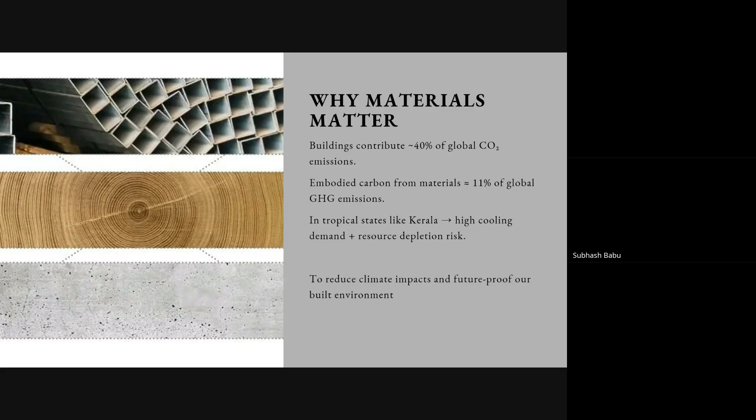This issue is particularly relevant here in tropical climates like Kerala. Our high climate demand for cooling, coupled with the intensive use of conventional materials, creates a dual pressure for increased energy consumption and heightened resource depletion. The objective of this presentation is to outline a strategic approach to mitigate this impact. By reevaluating our material selection, we can fundamentally reduce our environmental footprint and future-proof our built environment against escalating climatic and resource challenges.

This reality has prompted mandatory policy changes at every level. Nationally, we have the Energy Conservation and Sustainable Building Code, ECSBC 2024, earlier known as Energy Conservation Building Code. Kerala is the first state to publish the Energy Conservation Sustainable Building Code in the Gazette in the country, setting a new energy conservation standard, along with the Eco-Nivas Samhita, ENS 2024, which is especially focused on residential energy efficiency, just like our homes and thermal comfort.

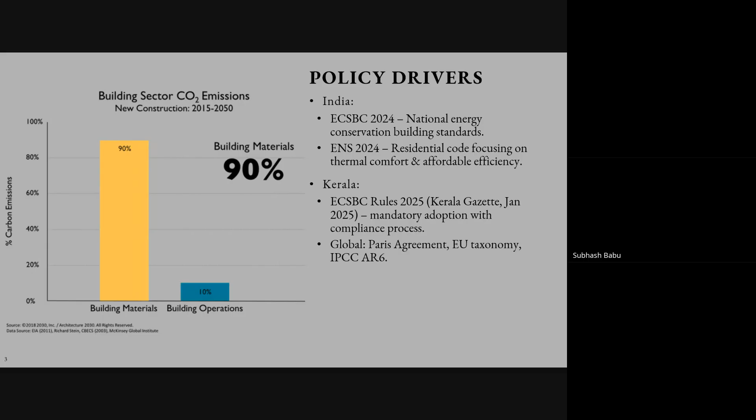Crucially, here in Kerala, the ECSBC rules 2025 have been gazetted, making the adoption of these standards mandatory, complete with the formal compliance process. And this is all aligned with the broader international commitment to decarbonization driven by major global accords like the Paris Agreement and the scientific directives from the Intergovernmental Panel on Climate Change, IPCC.

Having established the policy drivers for change, we now need a comprehensive way to evaluate our material choices. This slide introduces a framework for sustainability based on four critical dimensions. It's a holistic approach that goes beyond just carbon footprint.

First, the environmental dimension - this is what we discussed: a material's embodied carbon, its water footprint, and its recyclability. These factors are crucial for reducing a project's overall ecological impact. We must consider the economic dimension also.

We are not just looking at the initial cost, but the long-term benefits. This includes material's life cycle cost, which accounts for maintenance and disposal, and the significant operational savings it can generate through improved performance.

The third dimension, health, addresses the direct impact on people. We evaluate materials based on their ability to improve indoor air quality and whether they contain harmful chemicals known as volatile organic compounds.

Finally, we look at resilience. This is about the building's ability to withstand future challenges. Our material choices are designed for exceptional durability with an anticipated lifespan of 50 to 100 years or more, in full compliance with the National Building Code of India, NBC, and relevant Indian standards. We also ensure their adaptability and disaster performance against events like extreme weather.

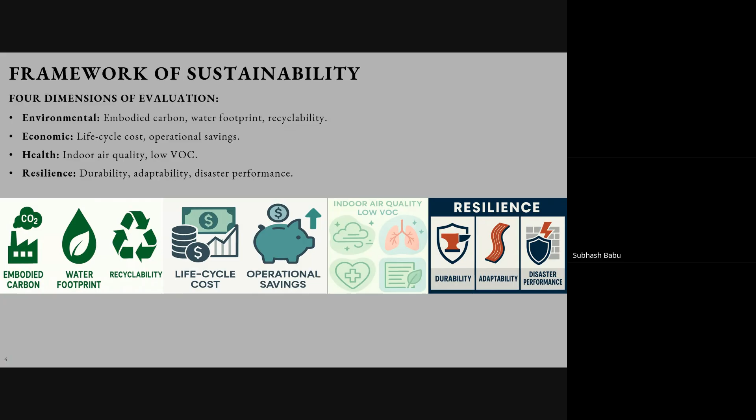We have discussed the framework for evaluating sustainable materials. Now, let's look at some key materials that meet these criteria. We are focused on the building envelope, which is the shell of the building that protects it from the elements.

First, let's consider the blocks for the walls. Alternatives like autoclaved aerated concrete blocks, hollow clay blocks, and compressed stabilized earth blocks have significantly lower embodied energy than conventional ones. They are not only resource efficient but also provide better thermal insulation.

Next are cool roofs. Materials with the high solar reflectance index, what we used to call the SRI value, typically about 78, reflect high radiation, so the heat absorbed will be reduced. This reduces the peak cooling load by 10 to 15%, directly translating to lower energy use.

For windows, advanced glazing is crucial. We use low emissivity and spectrally selective coatings that block unwanted solar heat while still allowing natural light to pass through. This enhances thermal comfort without compromising on daylight.

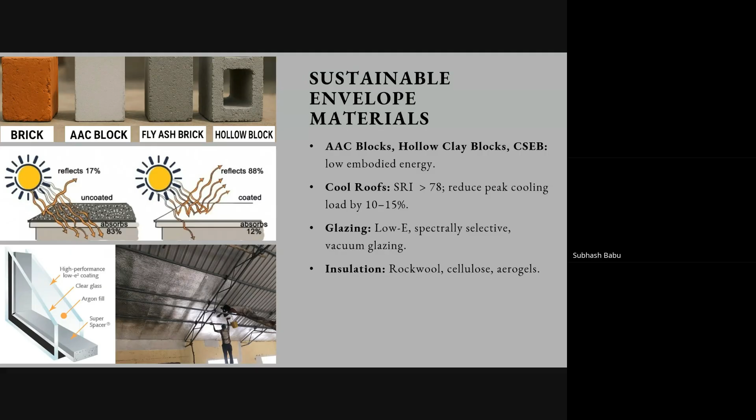After looking at the building, we have to focus on the single most significant source of embodied carbon: cement. The production of conventional cement accounts for roughly around 8% of global carbon dioxide emissions.

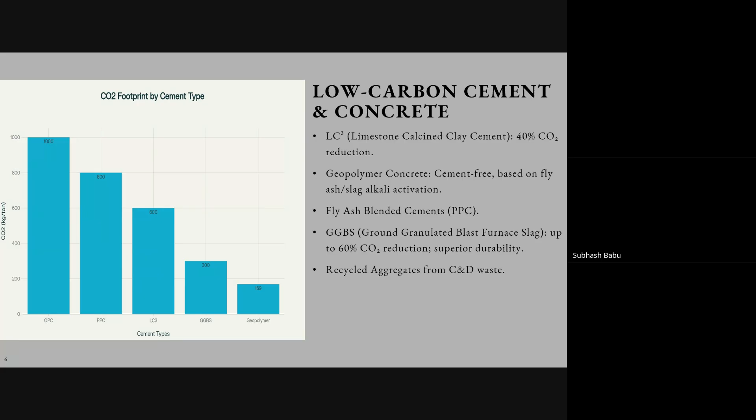However, a range of low carbon alternatives are now available. This chart clearly illustrates the dramatic difference in carbon footprint. As you can see, conventional ordinary Portland cement has a very high carbon dioxide footprint, while materials like geopolymer concrete have an incredibly low impact.

We have to achieve significant reductions in our projects by using these alternatives. Limestone calcined clay cement offers CO2 reduction. Geopolymer concrete is a game changer as it's completely cement free, using industrial byproducts like fly ash and slag. Similarly, we can use fly ash blended cements and granulated blast furnace slag, which can reduce emissions up to 60%, while also offering superior durability.

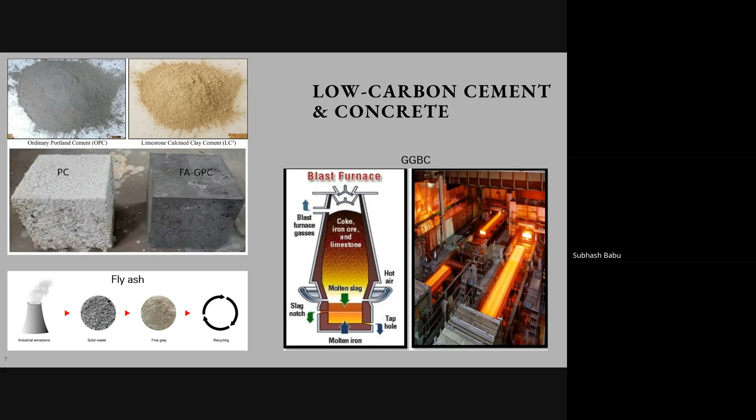We can also integrate recycled aggregates sourced from construction and demolition waste, which closes the loop on our material usage and reduces waste.

In addition to the innovations in concrete, we must also consider potential bio-based materials, which offer localized, rapidly renewable and high performance solutions.

The most prominent example is bamboo. Bamboo offers comparable high strength to timber, suitable for both structural and non-structural applications, including its innovative use in bamboo reinforced concrete construction. Its defining characteristic is rapid renewability. Bamboo matures within 3 to 5 years, making it an incredibly sustainable and rapidly replenishing resource.

This material has specific Kerala relevance. It is abundantly available locally, which significantly reduces our transportation footprint. We also have a long tradition of using bamboo in our architecture, from vernacular houses to scaffolding, which supports local economy and rural livelihoods.

From an environmental impact perspective, bamboo has very low embodied energy and a unique ability to sequester carbon, actively locking carbon dioxide away from the atmosphere as it grows. Finally, its applications are versatile, from wall panels and flooring to roofing and decorative elements, demonstrating its potential to be a comprehensive building solution.

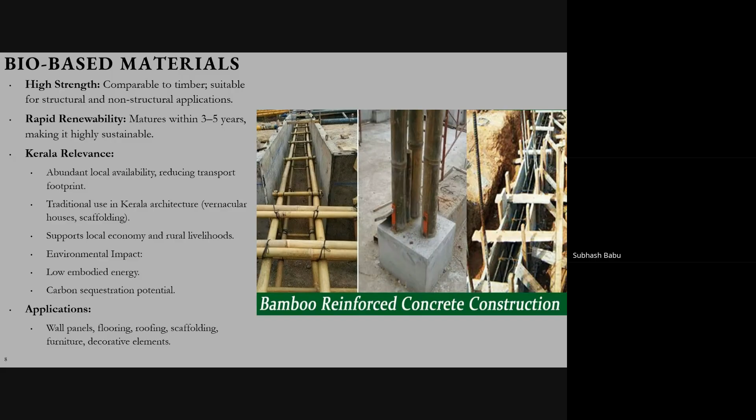Building on our discussion of bio-based materials, I want to highlight another innovative solution: hemp. When combined with lime and water to create a product known as hempcrete, it becomes a truly remarkable material. Its most powerful property is that it is carbon negative.

During its rapid growth, the hemp plant absorbs a significant amount of carbon dioxide from the atmosphere. This carbon is then naturally sequestered, or locked away, in the building material itself, which permanently reduces the overall carbon footprint of a project. Beyond that, hempcrete offers excellent thermal insulation properties for walls and roofs, which directly reduces the energy demand for cooling, a key concern in our climate.

It's also incredibly lightweight and breathable. The material naturally regulates moisture, which prevents mold and improves air quality, making for a healthier and more comfortable living or working environment. This material has high Kerala relevance as it's perfectly suited for our energy efficient residential and low-rise buildings, with potential for local cultivation given the right regulatory framework.

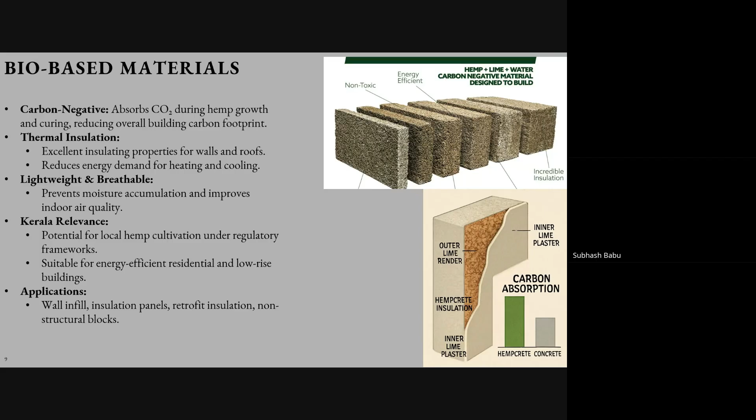To conclude our look at bio-based materials, I want to introduce a truly innovative, future-forward solution: mycelium composite. Mycelium is essentially the root structure of the mushroom, and we can grow it into building materials. This material excels in several areas.

Firstly, it's an example of waste upcycling. Mycelium grows by consuming agricultural waste like sawdust and straw, transforming it into useful construction product. Its production requires very low energy, as it's grown rather than manufactured through an energy intensive process.

Like hemp, mycelium also offers carbon sequestration, locking carbon dioxide from the atmosphere into the material during its growth. Perhaps its most unique feature is complete biodegradability. At the end of its building life, this material can be composted, returning nutrients to the soil and leaving no waste behind, just like food for plants.

While still emerging, mycelium represents the cutting edge of regenerative design, showing us where sustainable construction is heading.

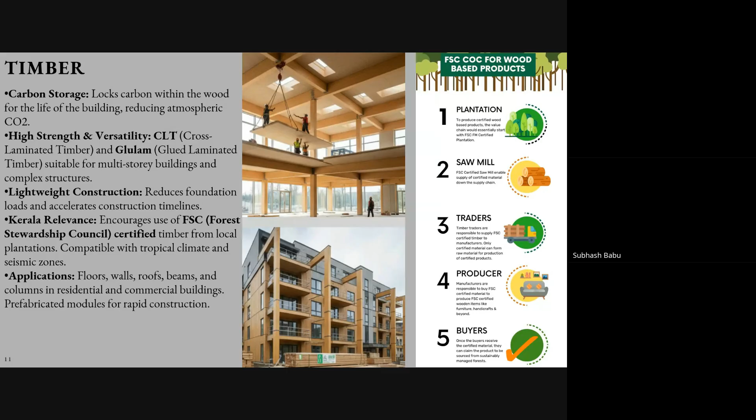If you mix these timbers with other timbers that are not certified with FSC, then the process is polluted, so the sawmill should be certified. Then traders who are trading this FSC wood have to be certified, so we can ensure we are buying wood from an FSC certified trader and that it is FSC certified material. Then the producer making these timbers for furniture or interior should also be FSC certified, so he understands how to use and procure this FSC certified material as a certified professional. If all four things come together, then only can we say we are using FSC certified, energy efficient material.

Beyond innovative bio-based options, we can also significantly reduce our environmental footprint by maximizing the use of recycled and circular material in our projects. This is about making the most of what we already have. Consider the case of steel.

We can specify steel that is produced using over 90% recycled content. Whatever steel we haven't used, we can recycle it for new products. This steel is often manufactured in an electric arc furnace, which significantly reduces the embodied carbon compared to traditional blast furnaces. And another thing, a step ahead,

now people with electric arc furnaces are also thinking about using renewable energy as their energy input so that it becomes more green. Then aluminum.

Aluminum is another primary example of circularity. Recycling aluminum requires 95% less energy than producing virgin aluminum. This makes recycled aluminum a highly sustainable choice for various applications.

And finally, innovative products like plastic waste boards and high density polyethylene lumber offer durable and versatile alternatives for non-structural applications like frame panels, etc., keeping plastic out of landfills and giving it a second life. So recycled plastic items used in building construction have very good scope.

We have focused on big ticket items like the building envelope and structure, but sustainability extends to the details of our projects, including the interior. These choices can significantly impact both environmental and health outcomes.

We can use low or non-VOC paints. VOC stands for volatile organic compounds, which are harmful chemicals that can be released into the air long after the paint has dried. By using low VOC paints, we directly improve the indoor air quality for residents and workers, creating a healthier living environment.

For tiles, we can specify eco tiles made from recycled ceramics. This is a great example of circular economy as it reduces the need for new raw material and minimizes landfill waste. For instance, a local ceramic manufacturer may take leftover tiles or broken crockery and process it into new natural tiles, saving a lot of energy and raw material.

Natural plasters made from materials like clay are excellent alternatives to conventional cement plasters. They are breathable, non-toxic, and help regulate humidity, which is a major advantage in a climate like ours. They give the walls a natural finish and can be tinted with natural pigments.

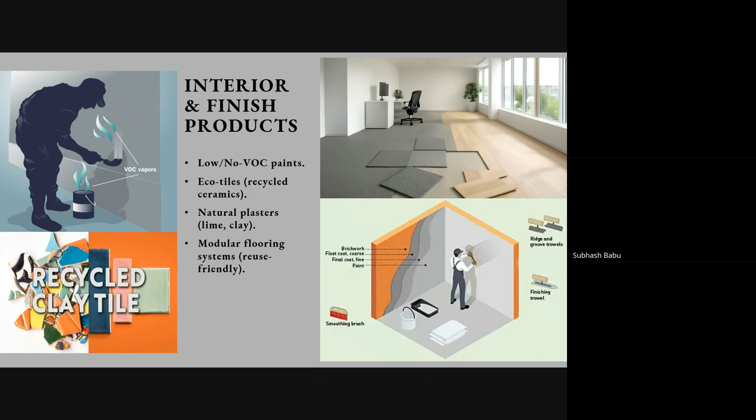Finally, we can use modular flooring systems. These are designed to be reused or easily disassembled and installed, such as interlocking carpet tiles and floating floorboards that can be lifted and moved without damage. This flexibility reduces waste during renovation and allows a longer and more sustainable life cycle for the products.

We have now discussed various sustainable materials, but how do we objectively compare their environmental impact? This can be done through a life cycle approach, using a tool called Environmental Product Declaration, which we call EPD.

Think of an EPD just like a nutrition label for building materials, similar to Horlicks or Boost. It's a third-party verified document that quantifies a product's environmental performance across its entire life cycle, from raw material extraction to disposal. These EPDs are based on international standards like ISO 14025 and EN 15804, which ensure that the data is transparent and comparable.

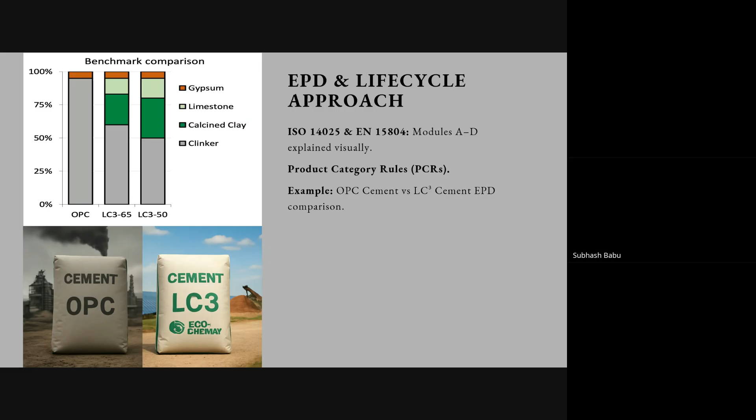They also allow product category rules, which provide standardized sector rules for specific material types, allowing us to make true apples-to-apples comparisons. The chart on this side is a perfect example of this. It shows an EPD comparison between conventional or ordinary cement and LC3 cement. The reduced clinker content in LC3 is shown in this chart, which is exactly why it has a significantly lower carbon footprint, as we saw in our earlier slides.

We have established a scientific way to measure materials' environmental impact through EPD. But that's only half of the story. The economic dimension of sustainability is equally critical. This is where life cycle costing comes in.

Life cycle costing is a methodology that looks beyond just the initial cost of the material. It takes into account all the costs associated with the product over its entire life cycle. We follow a standard methodology, ISO 15686, to ensure our analysis is accurate and comprehensive. The analysis period is typically 20 to 30 years, and it includes all relevant inputs: the initial cost of the material, the cost of operation and maintenance, and even future cost of replacement. All these things come into the data.

For example, when we take a life cycle costing of one bulb, what we will do is look at how much we paid for this bulb, and over the lifespan of its operation, how much we spend on that. In that case, we will look at the energy used to heat the bulb, so that also has to be considered, and the total sum will be taken. That is the life cycle cost. Throughout the life of the bulb, how much has the beneficiary paid for it. It's not just the price of the product, but using that product we have to pay, and including that, how much it costs. That is it.

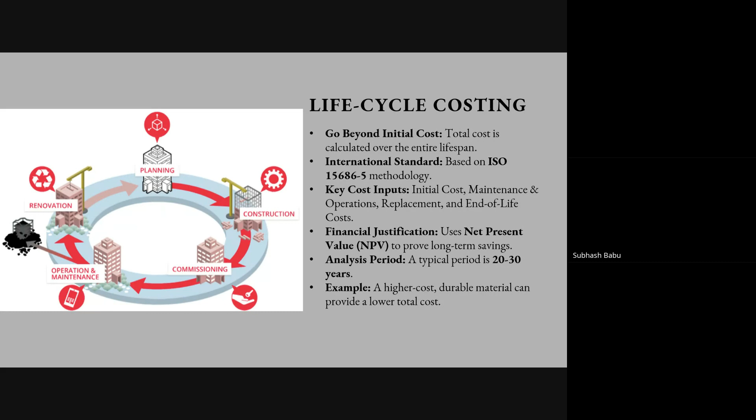To perform this analysis, we use what is called NPV, net present value, which all of us know. This allows us to compare long-term financial performance, providing a clear financial justification for choosing sustainable options that may have higher initial costs but deliver significant long-term savings.

To tie all these concepts together, we can look to our own backyard for local solutions by leveraging local material opportunities. We not only reduce our environmental impact, but also support our regional economy.

First, we have laterite and clay bricks, which are abundant in Kerala. Using these traditional materials in our projects is a simple way to achieve low embodied energy, as they are sourced and produced locally without significant transport or processing.

Next, we can explore coir-based composites. Coconut coir is a major byproduct in our state. By using it in a composite for insulation panels, we can create a renewable, locally available material from existing byproducts.

Finally, we have timber. When it is FSC certified, as detailed in the last few slides, and sourced from sustainably managed plantations, timber becomes a truly renewable and powerful local option. Actually, the importance of this FSC certificate is that once the timber is used, it should be replanted, and that system should be continuous. It should not stop after using it. It should continue.

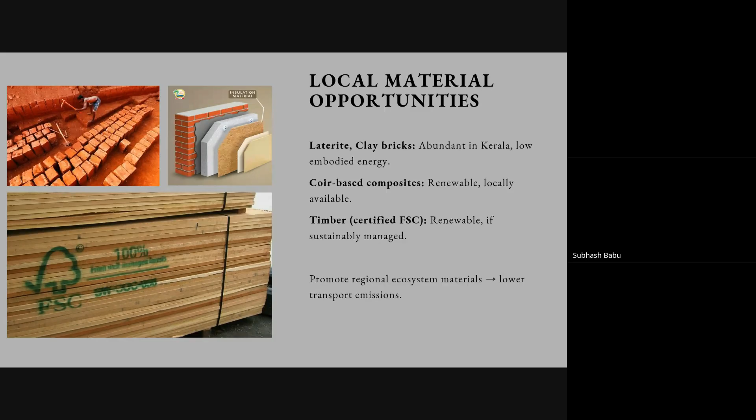The overall benefit of using regional materials is significant, resulting in a reduction in our transport emissions. By promoting our local ecosystem materials, we can drastically lower the carbon footprint of our project.

We have looked at the present and the past sustainability materials, but now let's look ahead. The future of building materials is not just about using better products. It's about using smarter tools to make better decisions.

Firstly, we are seeing the rise of digital integration with BIM linking to EPD databases. This means our design software can directly connect to a library of materials, each with its own nutrition label of environmental data. We can select a material in the digital model and instantly see its carbon footprint, allowing us to optimize our decisions in real time.

This digital data fuels the next step: AI optimization of the material mix. Think of AI as a powerful tool that can analyze thousands of material combinations. It can help us find the perfect recipe for the project, the ideal mix of materials that meet our goals for longevity, durability, and cost.

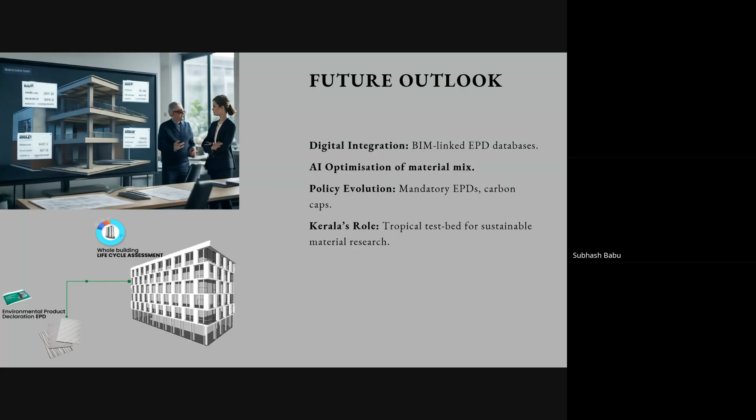We are also ahead of the curve with policy evolution. The global trend is towards stricter regulations. We can expect mandatory EPDs and even carbon caps to come into the standards. Our proactive approach means we will be prepared when these policies are enacted, giving us a significant market advantage.

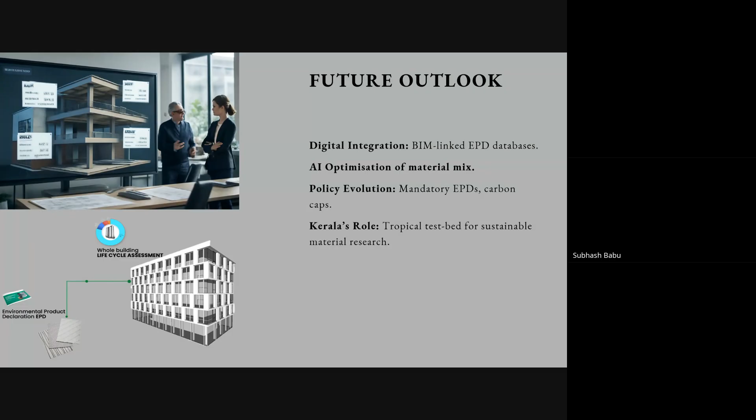Finally, all of this positions us perfectly to embrace Kerala's role as a tropical test bed. Our unique climate zone and local material opportunities like laterite and timber make our region a living lab, which can be at the forefront of this, actively contributing to and benefiting local innovation.

So before we move on.

I just want to conclude that sustainable materials are not optional add-ons. They are central to climate resilience, energy security, economic savings, and human health. Every slide we have gone through supports this trend.

They are central to climate resilience because materials like LC3 cement and hempcrete directly reduce our carbon footprint. They provide energy security by making our buildings more efficient, reducing our dependence on air conditioning and electricity from the grid. They lead to significant economic savings in the long term, as we proved with our life cycle cost analysis. Finally, they improve human health by eliminating harmful chemicals from our interiors, creating healthier living and working environments.

This is not a niche, it's a core business strategy that directly impacts our future. It's a foundational step towards building truly sustainable growth.

With that, we can now move from material resources to the equipment that powers the building. So that first section is over, and now we will move to the equipment sector.

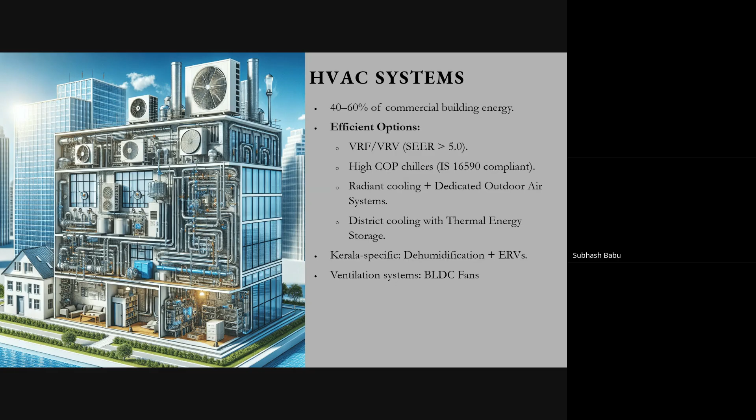We can also look at more advanced strategies like radiant cooling with a dedicated outdoor air system. This is a very efficient way to cool spaces by cooling surfaces rather than just air. For larger urban scale projects, district cooling with thermal energy storage is an excellent option as it centralizes cooling production and saves on energy costs. And finally, for our specific climate in Kerala, we can't forget about dehumidification and a simple yet highly effective technology, BLDC fans. By integrating systems that specifically handle moisture and air movement, we can dramatically improve both efficiency and indoor comfort.

To put all the technical details just discussed into perspective, let's look at a direct comparison between conventional systems and the sustainable options we are proposing. On the left side, we have the conventional approach: standard chillers, simple ductwork and conventional fans. These systems are inherently inefficient with low SEER ratings, and they account for 60% of building energy use.

They rely on basic controls, meaning they often cool unoccupied spaces and waste energy. While their initial cost is lower, their long-term operational costs are high. So here comes what I told you about life cycle costing.

You have to compare with the life cycle cost when you procure it. On the right, we have the sustainable approach: by investing in high efficiency chillers and VRF systems with high SEER ratings, we drastically reduce our energy consumption. We also integrate modern technologies.

Like BLDC fans, which use up to 70% less power than conventional fans, and systems that specifically handle our humidity. The result is a system that has a higher initial cost but delivers significantly lower operational costs over its lifespan. This is a clear example of the life cycle costing principle.

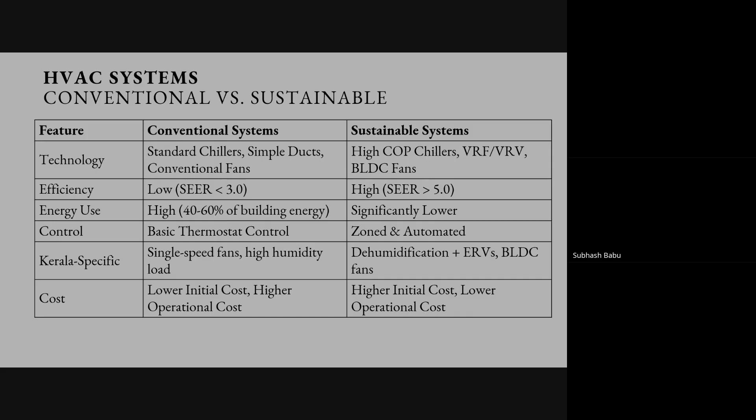After HVAC, the next biggest consumer of energy in a building is the lighting system. Fortunately, this is an area where we can achieve some of the fastest and most impactful savings.

Our approach is based on two key principles: using efficient light sources and installing smart controls. For light sources, we are transitioning to LED luminaires, which are incredibly energy efficient and can save up to 60% of the energy consumed by older lighting systems. For smart controls, we will use daylight and occupancy sensors to ensure lights are only on where they are needed.

We can also integrate smart dimming systems using protocols like DALI to adjust light levels automatically throughout the day. In Kerala, our high daylight availability is a major asset, allowing us to implement daylight harvesting to maximize natural light and further reduce energy consumption.

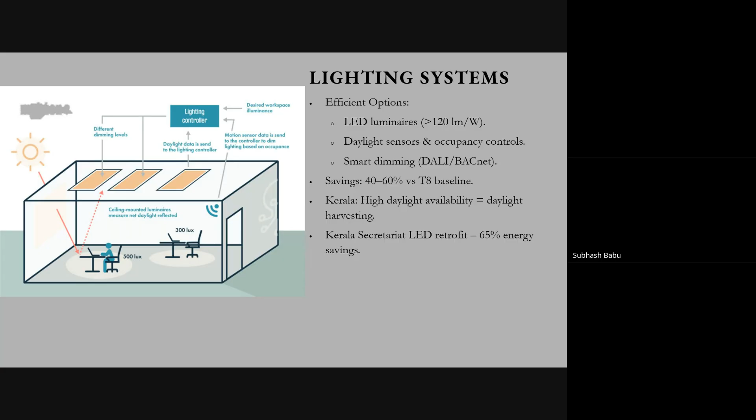The Kerala Secretariat's LED retrofit is a great example, achieving 65% energy savings. This project is being done by the Energy Management Centre.

Excuse me, one minute, let me have a cup of water.

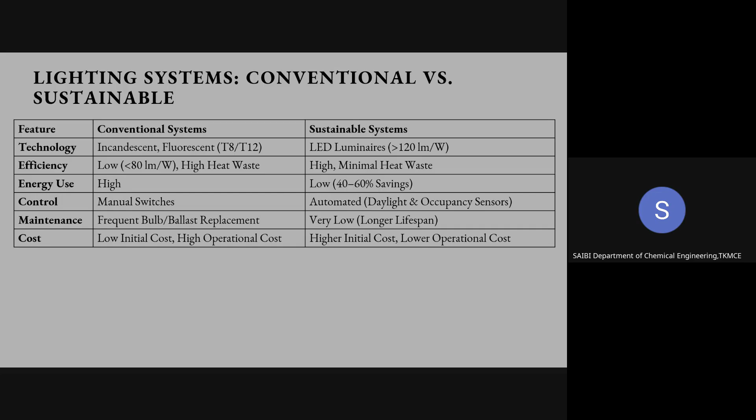So we compared the HVAC system. Let's now look at a clear comparison for lighting. This is an area where the choice makes a massive difference.

On the left, we have conventional lighting like fluorescent and incandescent bulbs. These are low efficiency technologies that produce a lot of waste heat and have a low lifespan, requiring frequent maintenance. They rely on single manual switches, so the lights are often left on unnecessarily, leading to high energy bills.

On the right, we have modern LED lighting systems. These are incredibly efficient, delivering over 120 lumens per watt, which translates into 40 to 60% energy savings. The real power comes from automated controls. By using daylight and occupancy sensors, we ensure lights are only on when and where they are needed. This higher initial investment is quickly offset through drastically lower energy bills and almost zero maintenance, as LEDs last for tens of thousands of hours.

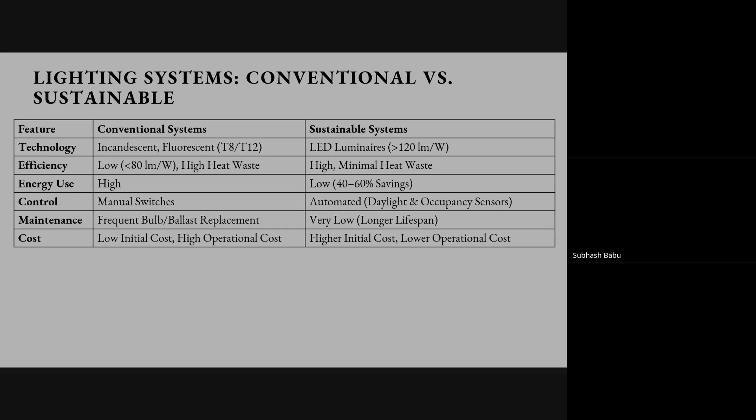Actually, this generation of people has already experienced these things, because we have gone through all three types of lighting systems in our residential sector. Earlier it was incandescent lamps, filament lamps, then there was a shift towards fluorescent lamps and compact fluorescent lamps. Then suddenly there was a shift to LED. We have all witnessed these changes in our lifetime.

Our next category is water heating, another significant energy consumption. Fortunately, we can make this process incredibly efficient using solar and heat pump technologies. We have a few key options.

First, solar water heaters use the sun's free energy to provide hot water. For this, we would use systems that are compliant with Ministry of New and Renewable Energy standards to ensure reliability and quality.

Second, for cloudy days or high demand, we can use heat pump water heaters. These are extremely efficient, with a coefficient of performance greater than 3. If COP is 3, it means the system provides 3 units of heat energy for every 1 unit of electricity it consumes.

The most effective solution for our climate is hybrid installations that contain both. As you can see in the image, this system uses solar as the primary source and the heat pump as an efficient backup. This is a perfect fit for us in Kerala, as we have excellent solar resources, receiving 4.5 to 6 kilowatt hours of solar energy per square meter per day. This makes solar hybrid systems a natural and highly effective choice for power.

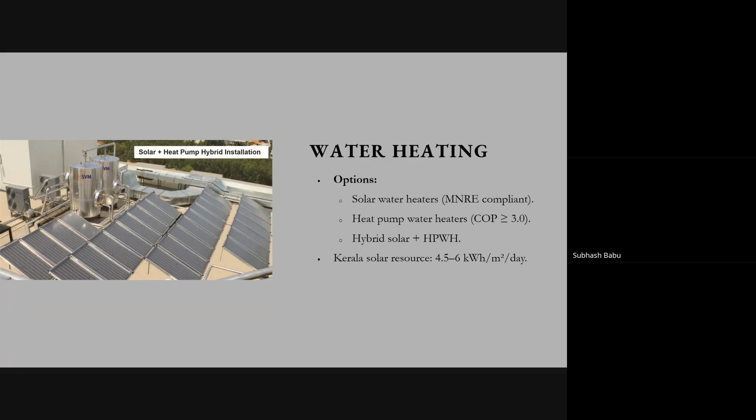To summarize this section, let's look at a clear comparison for water heating. On one side, we have the conventional electric geyser. This is a very inefficient method, as it uses an electric heating element to directly heat water. This results in a coefficient of performance less than 1, and it costs a lot to run. Compared to our heat pumps, it's inefficient.

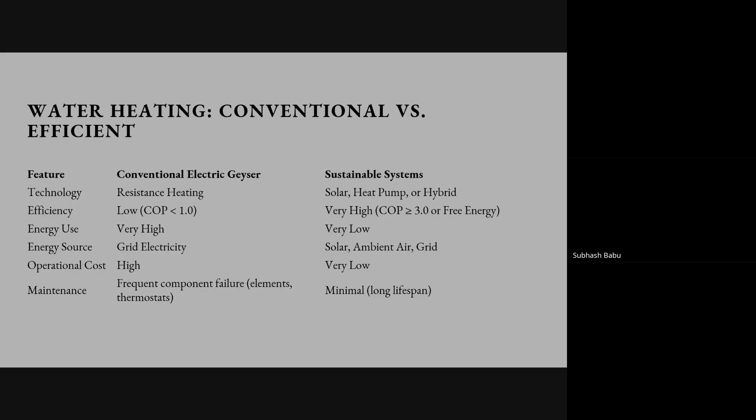On the other side, our sustainable solutions use advanced technologies and free energy from the sun. Heat pump water heaters have a high COP, typically 3 or more, because they move heat rather than creating it. The best part is the solar water heater, which uses the sun's heat, making it virtually free to operate. While conventional units have low initial costs, sustainable systems have very low operational costs, leading to significant savings over the long term. For locations like Kerala, with its abundant sunlight, this choice is a confident one.

It's about leveraging key technologies to drive down cost. First, gearless with VFD, variable frequency drive. These systems use up to 80% less energy than old motors. They eliminate the friction and energy losses of the gearbox. The VFD ensures the motor uses only the power it needs for the load. A lot of VFDs give better performance wherever there is a variable load. That's all of us know.

Then regenerative braking - this is the game changer. When an elevator is carrying a heavy load down or a light load up, it's generating energy. Our new system captures this energy and feeds it back to the building's power grid, creating a direct energy return. You might have heard about these systems in cars. It's the same thing in a different way.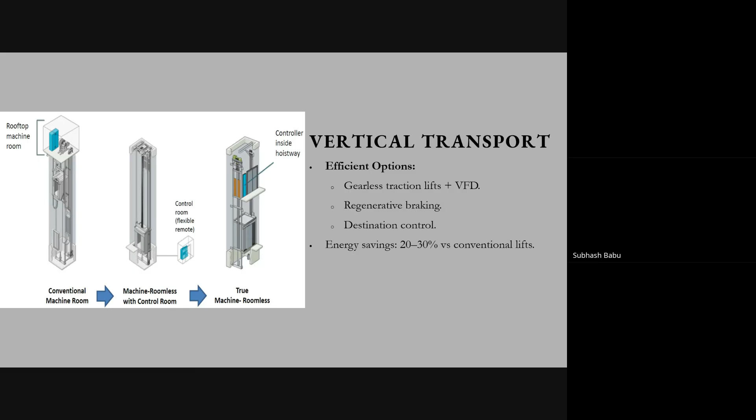You might have seen this in some modern buildings. Usually we see the floor selection control inside the elevator. But in new buildings, you have to choose your destination floor outside the elevator. That selection is made outside to enable the destination control system. Those elevators have adapted this destination control system - I just pointed it out. Whenever you see such a system, you can identify that this is used for that.

When we look at our vertical transport, we are essentially comparing two systems: one designed to move people, and one designed to move people efficiently. The key difference lies in the technology. Our old conventional elevators use energy-wasting geared motors and outdated braking systems that simply throw away excess power as heat. They also require a large dedicated machine room, which is a significant waste of space and resources. In contrast, new energy-efficient elevators are built around three core principles: drive efficiency.

We have replaced old motors with gearless variable frequency drives. These eliminate friction and ensure the motor uses only the exact amount of energy needed for the load and speed. The second principle is energy recycling. Our new system uses regenerative braking - when the elevator moves in a way that generates energy, it captures that power and feeds it directly back into the building's electrical system. Integrated.

The last one is intelligent control. With destination dispatch, we group passengers and reduce the number of stops, which directly translates to less energy consumption per trip. This is a leap in performance - these new systems can give up to 30% reduction in elevator energy consumption, directly reducing our bills. A significant step towards making the building high performance and sustainable.

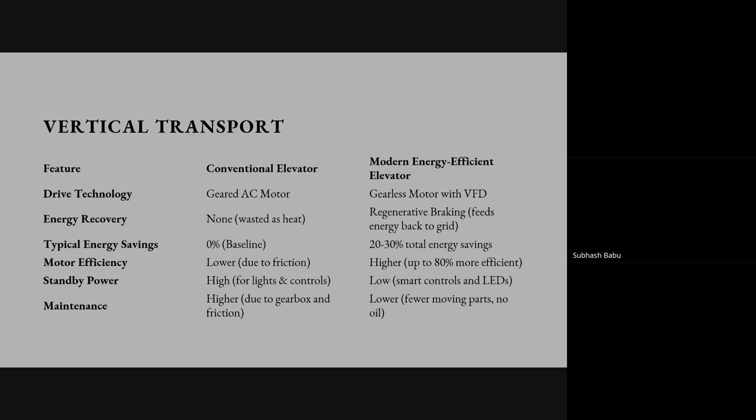Now we have discussed the individual components. Let's look at the system that connects everything: building controls and management. This is where we use smart technologies to optimize the performance of all our systems. Our strategy here involves a few key technologies. First, building energy management system, BEMS. We want to implement BEMS with demand response.

This isn't just a single timer. It's a smart system that uses artificial intelligence to predict energy needs, optimize schedules, and adjust our systems in real time to avoid energy waste and manage our peak loads.

Second, we will install smart meters as standard. This provides us with granular data on exactly where and how we are using energy. It's a key requirement for energy green building certification, and it gives us the data we need to make informed decisions.

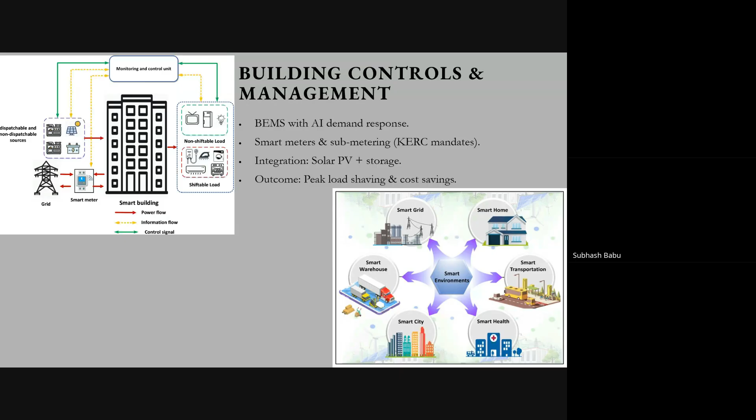Finally, we integrate these controls with our solar PV plus storage solutions by linking our on-site power generation to our buildings' energy consumption. We can intelligently use our own clean power. The ultimate outcome is clear: we can perform peak load shaving to reduce our energy cost and achieve significant long-time savings. This is how we take our buildings from static structures to intelligent, high performance systems.

Now there are some regulations that we have in place. We have established the foundation of the national building code. Let's start talking about the role of the state.

As the Energy Management Center, we are the state-designated agency under the Energy Conservation Act of 2001. We are the architect of Kerala's specific energy roadmap for sustainable buildings.

Our core mission at EMC is to drive energy conservation, and our primary tool for this is the Kerala Energy Conservation and Sustainable Building Code, KECSBC, 2025. This code is not just a regulatory document, it's a blueprint for building a more sustainable future.

The KECSBC is built on two key principles: the use of sustainable materials and the installation of energy efficient equipment. When we talk about sustainable materials, we are focusing on the building envelope.

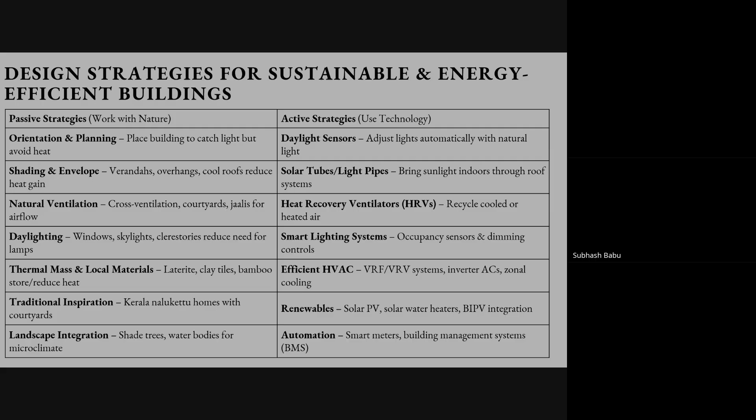Thermal mass: we can use materials that absorb and store heat during the day and release it slowly at night, helping to regulate indoor temperature. These strategies are the first and most effective steps in reducing energy demand. By incorporating these passive design principles from the very beginning, we build a foundation of efficiency that will last for daily life.

We have covered the what and why of our energy core. Now let's look at the how. In simple terms, our strategies build on a few straightforward ideas that are as old as architecture itself, but now backed by modern science. First, building orientation and shading.

Think of it like this: your building is putting on a pair of sunglasses. By placing the building to face the right direction and using features like overhangs, we can block the harsh sun. This keeps the building from getting hot in the first place, and it's our first step towards saving energy.

Next, we have natural ventilation and daylighting. This is about getting the building to breathe. We design spaces to be open and airy, with windows on opposite sides to create a breeze. We also use natural light as much as possible, which means we don't have to turn on the light as often. This is a simple, no cost way to make the building more comfortable and save on electricity bills.

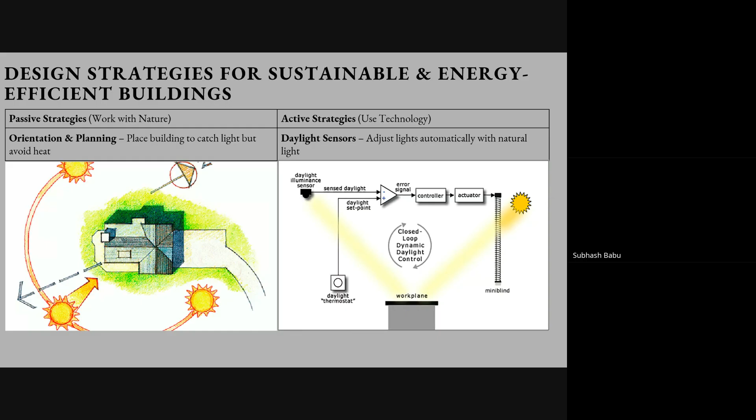These three strategies are the most impactful things we can do to make a building energy efficient before we even turn on a single switch.

We talked about passive design principles, and now let's look at how we apply them directly to light and heat. Our strategy is twofold: we use shade to block unwanted heat, and we use the sun to provide clean power for our light.

First, shading. In our climate, the sun is both a friend and enemy. While we want its light, we don't want its heat. So we design buildings with built-in shade. These fins and strategically placed overhangs block direct sun from hitting our windows. This simple design feature dramatically reduces the work our air conditioners have to do.

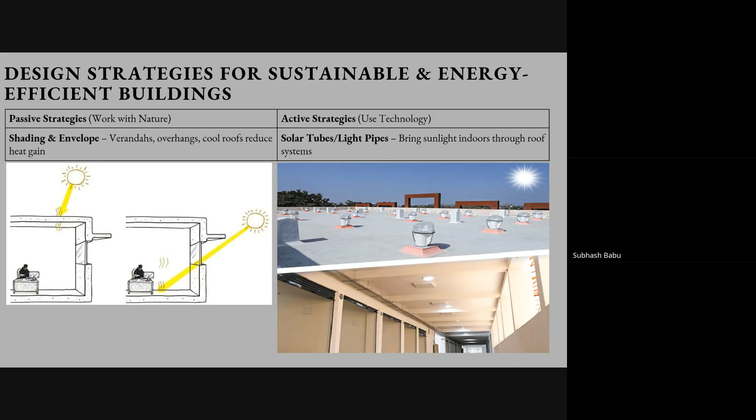Second, we are promoting solar power. We install solar panels on the roof to capture the sun's energy. This energy is stored in batteries and used to power highly efficient LED lights throughout the building, especially in common areas and parking lots. This clean, renewable energy source directly cuts our electricity bill and reduces our reliance on the grid. By using shading to control heat and solar panels to generate power, we are making our buildings more resilient and self-sufficient.

We have talked about how we can build more intelligently, and a crucial part of that is how the building breathes. The KECSBC focuses on two key elements to manage this: ventilation and heat recovery ventilators.

First, ventilation. We are moving beyond just opening windows. Our code mandates that all habitable spaces have a proper outdoor air supply. This ensures fresh air circulation continuously, making the indoor environment healthier and more comfortable for everyone. But we do this smartly, especially in air-conditioned spaces.

This is where heat recovery ventilators come in. An HRV is a device that captures the energy from the air leaving a building and uses it to either pre-cool or preheat the fresh air coming in. This means we get a constant supply of fresh, clean air without wasting energy or spending extra on cooling or heating the air inside. By combining proper ventilation with the efficiency of HRVs, we can maintain excellent indoor air quality while significantly reducing the energy needed for our HVAC system. It's about designing buildings that are healthy for people and for our planet.

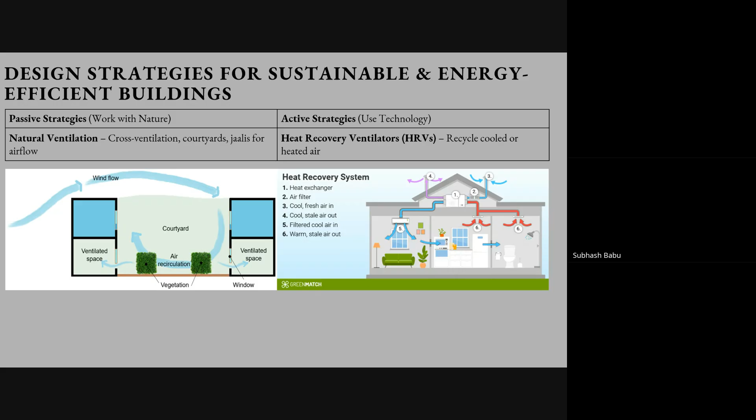We talked about building designs, and now we will focus on how we light it, both naturally and with technology. The ECSBC encourages smart approaches to lighting that dramatically cut energy use. Our strategy is twofold.

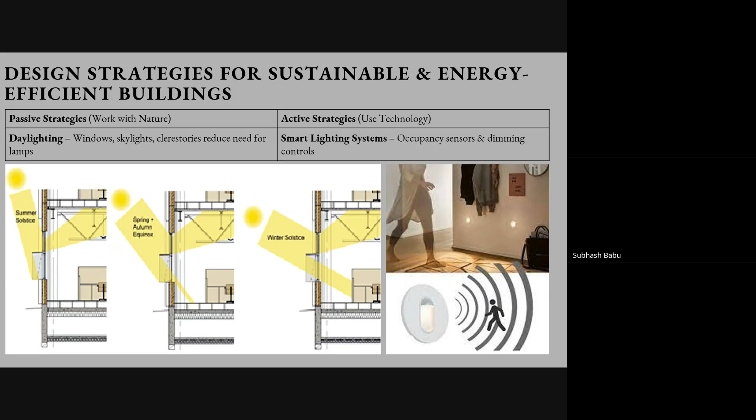By combining these two approaches, we can create a lighting system that is both energy efficient and highly responsive to how the building is used. This is a crucial step in our mission to build smarter and more sustainable assets.

We have talked about design, and now we will talk about materials and systems that make these designs work. Our approach is a smart fusion of traditional wisdom and modern technology.

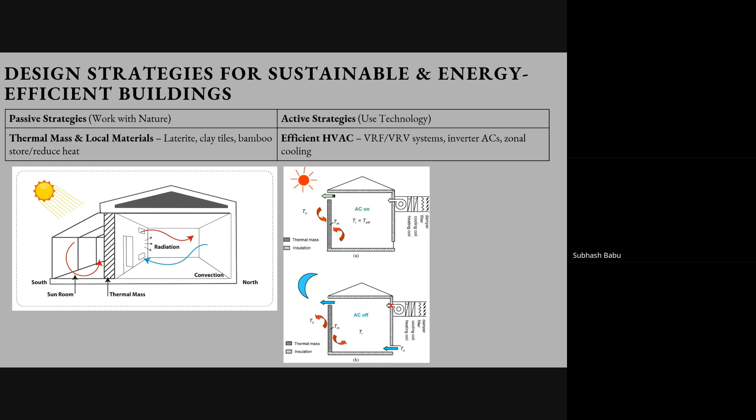Next, we look at efficient HVAC systems. Instead of old, inefficient systems that are either fully on or off, we are promoting advanced technologies like VRV systems and inverter ACs. These are incredibly smart - they can adjust their power output to match the exact cooling needs of the room. We can also use zonal cooling to cool only the occupied parts of the building, so we never waste energy on empty spaces. By combining the natural thermal properties of local materials with the intelligence of modern HVAC, we are building assets that are both sustainable and highly efficient.

As we near the conclusion, let's look at how our code integrates timeless wisdom with cutting-edge technology. It's about combining the best of our heritage with future energy.

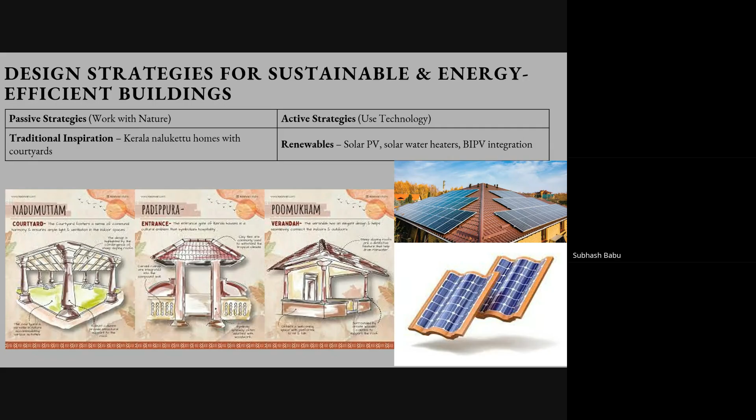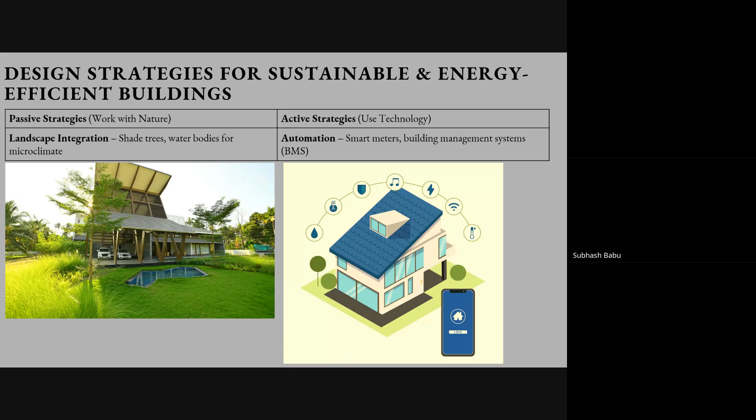As we finish up, I want to leave you with a final thought. The work we are doing here today isn't just about new rules, it's about being part of a larger mission, a movement. Here's where we fit in. First, on a global scale, we are on the same team as the rest of the world by following international standards from groups like ISO and EU. We make sure our buildings are just as good as the best in the world.

Second, on a national level, we are a key part of India's mission by implementing the new ECBC 2024. We are helping our country lead the way in building a sustainable future. And finally, on the local front, here in Kerala, this is where we make it real. Our new ECBC rules 2025 are the local force that makes all of this happen. We have made these rules a mandatory part of getting a building permit, which means every new building is a step towards a greener future for our state. It's a clear path from global standards to national goals and finally to local action, and together we are making that happen.